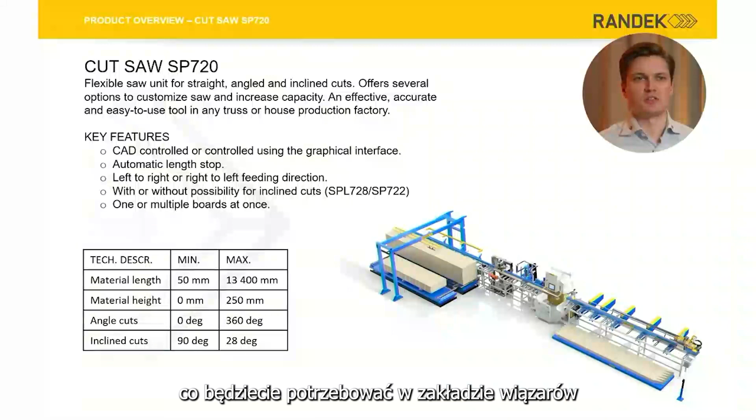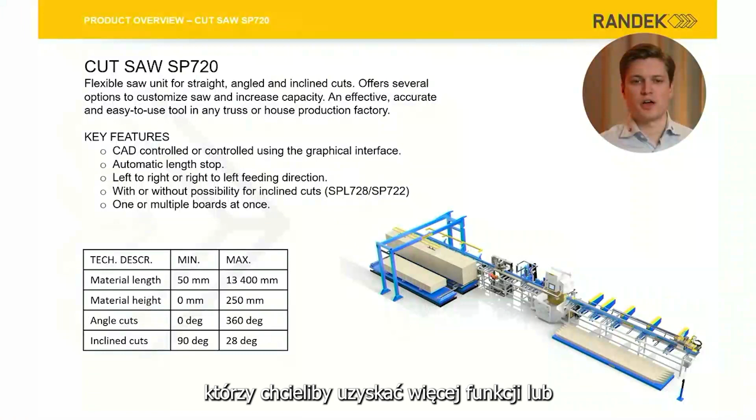As its base configuration, it does everything you will need in a truss factory or in a house factory for building walls and floors, gable ends, and so on, building elements. But we also offer a lot of options, add-ons and features to this concept to cater to customers that would like to add more function or put a specific task into this section of the factory.

So on the in-feed side, we have timber pickers. On the way into the saw unit, you have splicing presses, milling unit, drilling unit, label printers, and on the outfeed side, we offer different solutions for timber stackers as well.

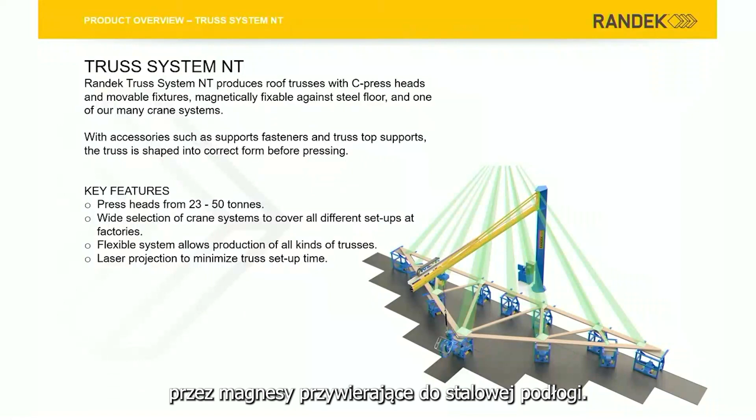For the truss system, we offer the NT press system. It's a very flexible system that basically can help produce any kind of truss design. We do this by movable fixtures that we can fix magnetically on a steel floor. On top of those, you add the pieces for the truss and the press plates, and you go around with a C-press, suspended in a crane system, and press each joint.

To further help and to minimize the setup time, you also have a laser projection system to help you. So to have the optimal press and crane system, we always take a look at the conditions in the existing factory. We take a look at the nail plates that you commonly use, and also the most commonly produced roof trusses as well. And this boils down to a crane system that you need.

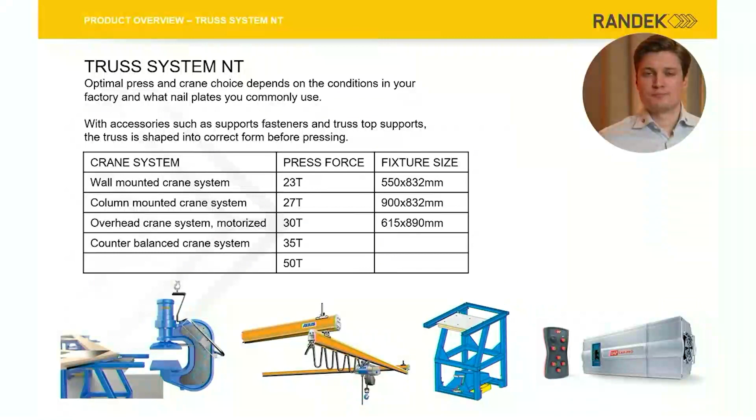We have various different ones, from wall-mounted, column-mounted, or overhead crane systems. In terms of C-press, it boils down to a specific press force from 23 tons to 50 tons. And for fixtures, it's a matter of how many and which size, which we, of course, help our customers with. As an option as well, as I mentioned, we also have laser projection systems where you can project the outlines of the truss and help you set up the system between different truss designs.

For wall panels, building elements, floor, ceilings, roofs, gable ends, we have our butterfly system, BS20 tables. It's also a very flexible system. It is a tool for producing a high-quality product in the end, very effectively, and it's a focus on getting equipment on site very fast as well for our customers doing the job.

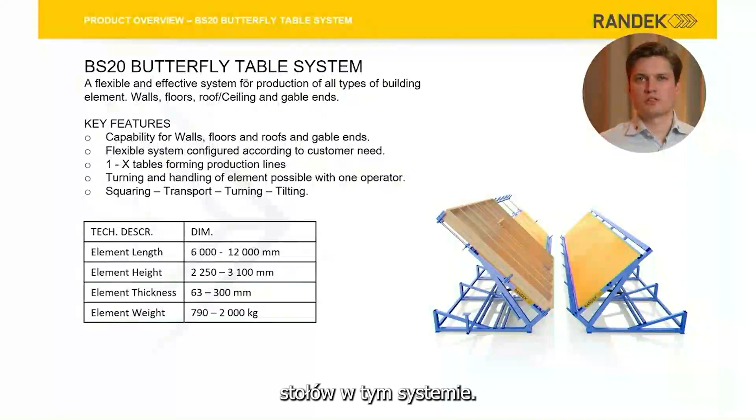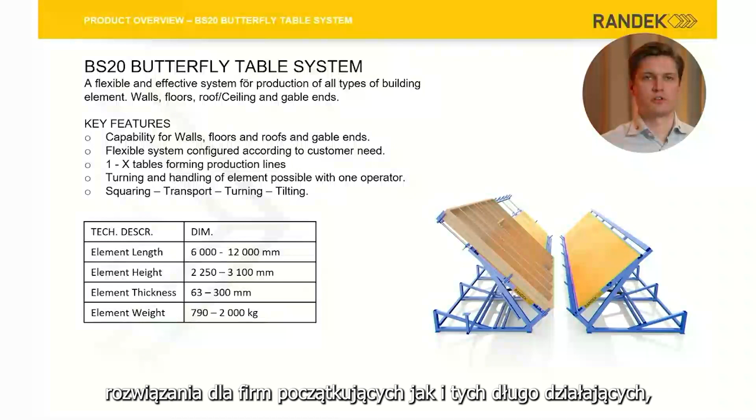We can do different configurations with each table in this product range, which makes it possible for us to have solutions for startup companies or even well-established companies producing a lot of product today, but looking for having more of a line concept or increase the efficiency in the factory. So within each table, you can have the base configuration of just an upriser and receiver, but you can also do configurations of bigger lines, how many tables you would like to have.

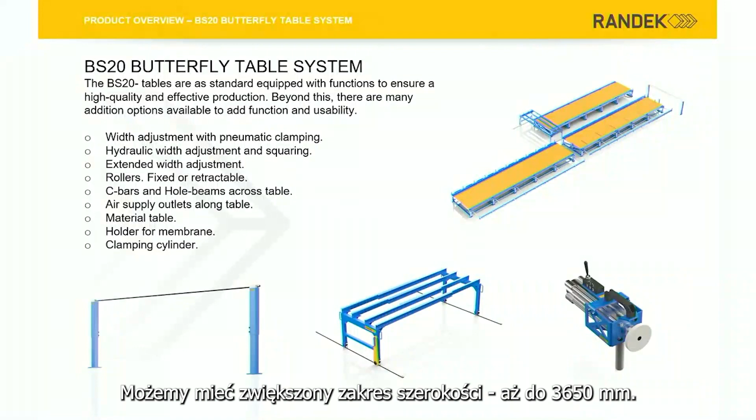And we do this by having different options for width adjustment. It can be manual or hydraulic or with pneumatic clamping. We can have extended width adjustment up to 3,650 millimeters. You can add rollers to the tables, either fixed or retractable, so it's folded down into the tables.

We can also add air supplies to make sure you can connect your tools, and on top of that, we can also provide our customers with options for material handling, such as material tables and holders for rolls for membranes and foil. We also have a clamping cylinder to make sure we can do angled elements within these tables.

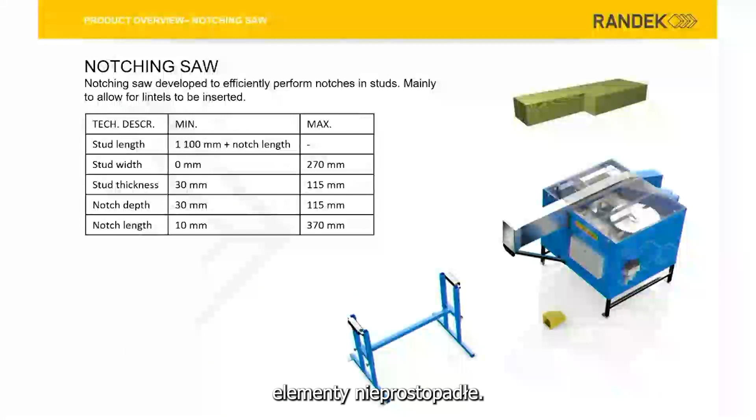For notches or cutouts in studs for wall elements to be able to make lintels, we have a specialized tool. This is possible with the SP720 as well, but if you want to do it as efficiently as possible, we have a specialized tool for this, the notching saw. It's a very easy to use tool, a very fast tool. It's a cycle time of about 5 seconds, and it's a small piece of equipment that you can move around in your factory, bring out when you need it, and so on.

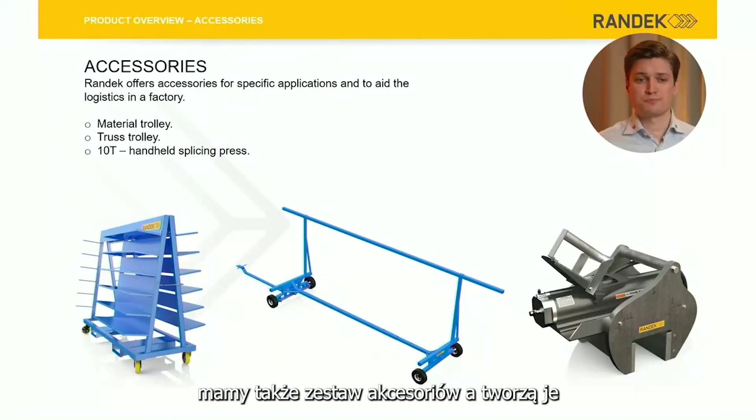So on top of all this, the product lines that we offer, we also have a set of accessories, and these are made up of products for logistics within the factory, but also specialized tasks in the factory, in the process of building all elements. So we have material trolleys, roof truss trolley, and also a handheld press for nail plates.

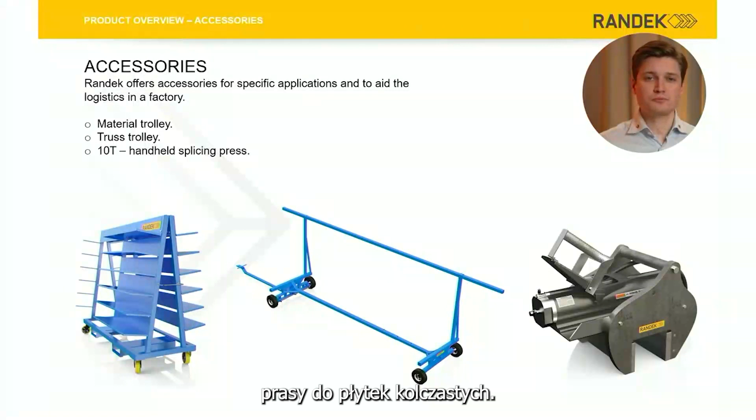So you can splice together pieces directly at the table. It's a handheld, air-driven piece of equipment, with hydraulics for the press unit, which makes it possible to press up to 10 tons.

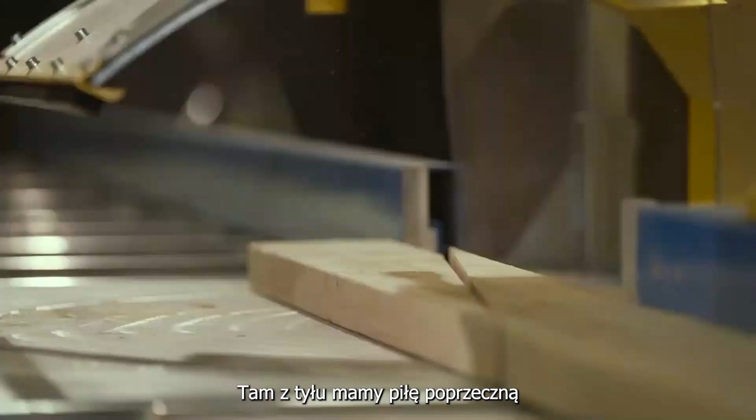So Martin, what machines are included in the House Factory Startup Concept? Yeah, we have different types of machines. In the far end, we got a cut saw. That's in the SPL 720 series. And behind me, we have the BS 20 tables in the BS system. Okay. And behind you here, we got the NT press system.

Okay. For roof trusses. And in the middle, we got the notching saw, for special cuts. Okay. So we're actually looking at this setup of machines, and it's an entire house factory in quite limited space. Yes. Well, it's really impressive, really impressive. So, Martin, when talking to customers about the startup concept, what are the general comments you get?

Yeah, it's a robust product and is cost effective. And the total cost of this is less money than the production of one house. Wow, so an entire house factory for less money than a single house costs? Yes. Wow, that's really impressive. I'm eager to start the demonstration, so where do we begin?

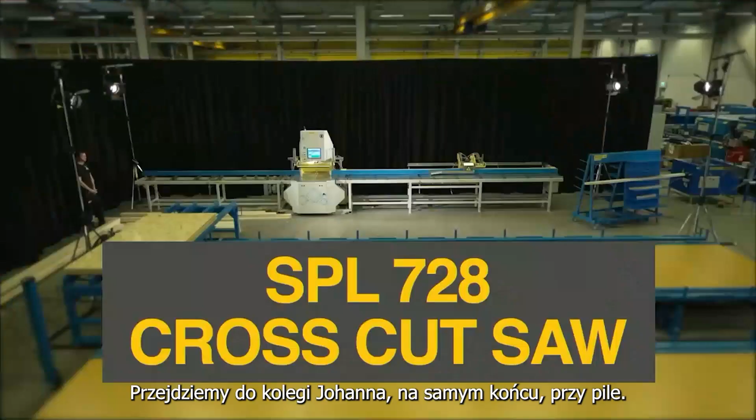Yeah, we'll go over to our colleague, Johan, in the far end at the cut saw. Okay, let's go. Shall we take this with us? Okay, let's do that. Okay, so here we have our service technician, Johan. Hello. Hello. He will help us to demonstrate the saw today.

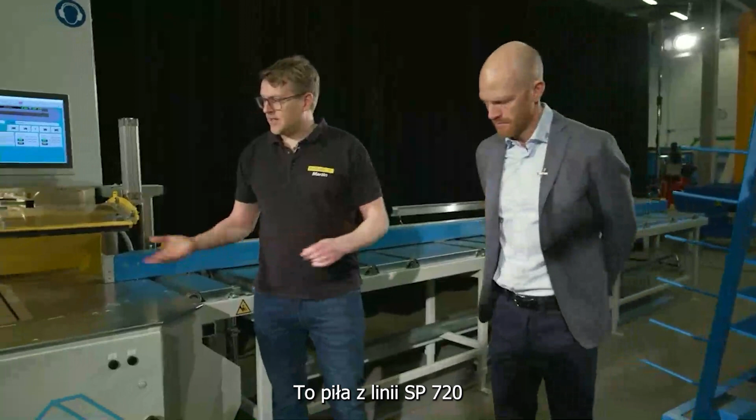But before we begin, Martin, here we have the SPL 728 crosscut saw. So can you tell us about the saw and what parts are included? Yeah, this one is a saw in the 720 series. Over here we have the infeed bench. Yes. We can load in your material. And here you have the sawing unit. This unit comes in two different types, 728 and 722. Okay. The difference is the blade can angle in the 728. Okay. So otherwise two different saw units.

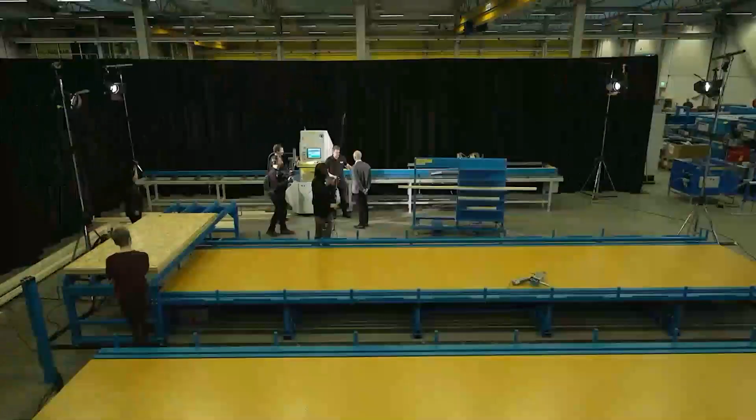Yeah. Okay. And behind me we have the outfeed bench with automatic length holder. Okay. So this is, I guess, kind of like a standard saw. In what ways can the saw be customized? You can change the length of the infeed bench to different lengths depending on incoming material. You can also change the outfeed bench with the same length dimensions. Okay.

And does it come with like a milling unit and splicing press? Yeah, you can add a splicing press, a milling unit, and a drilling unit. Okay, sounds like a very versatile and flexible saw. Yeah, it's very flexible. But if you want to increase the capacity, do you need to buy one more saw, or can you upgrade? Yeah, you can add an infeed picker, so you can pick up material from the material pile, so you don't have to lift it up by yourself. And also you can place a stacker in the far end here, so you can pick out the material. Okay. Very interesting. Shall we begin the demonstration, Johan?

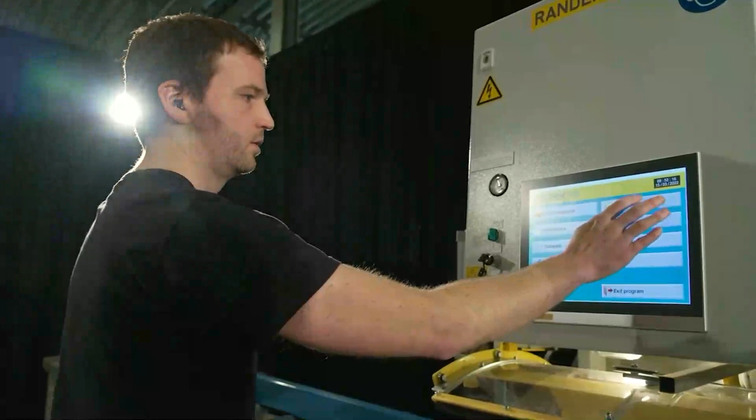Yes. So, first of all, we're going to cut a truss that I have already prepared. And I will say this is the way that most customers use the saw, running from a file. We can go from the main page, load from file. And here we have it prepared. These are all the pieces that we're going to need for this small truss. So we can press them and we can see how they look. Okay.

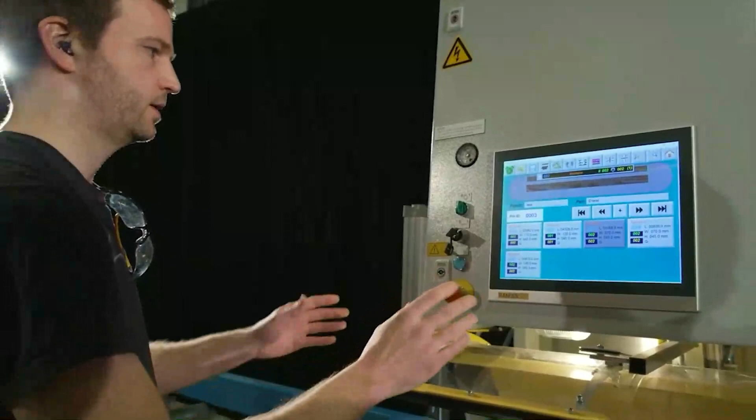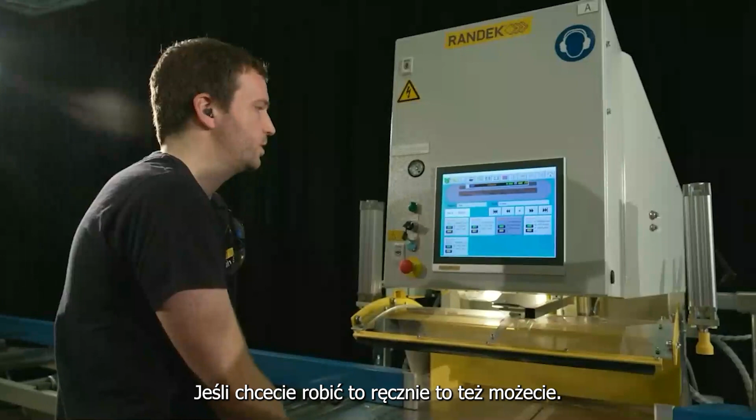The more angles you have and different lengths, the more benefit to do it from a file. It will save you time. Otherwise, you have to manually put in the degrees and the lengths on every piece. But here it's already prepared. But you have the possibility to do it manually as well. You can do it manually, just fill it in from a paper. Okay. You have that option too.

Martin, can you describe the process behind the file and the transfer from CAD software to the saw? Yeah, many of the roof truss producer softwares, where they draw the roof trusses, can send the data to the saw unit. They have a little converter file they have to add in the system. So then it's converted and goes directly to the saw system. Okay, so like an automatic process from the software, and then the saw will set up automatically according to the file. Yeah, and then the operator has to load the file here.

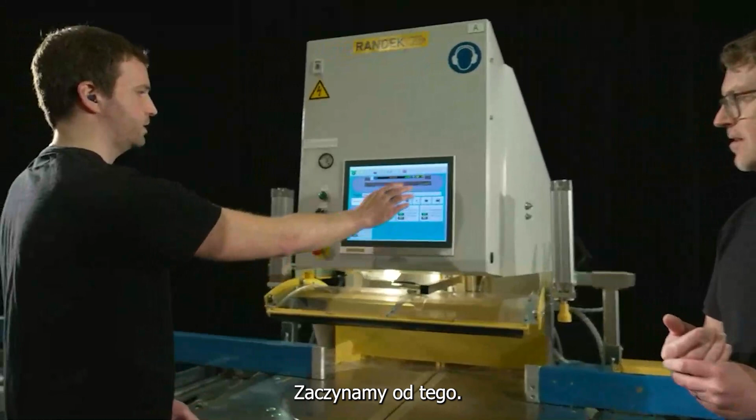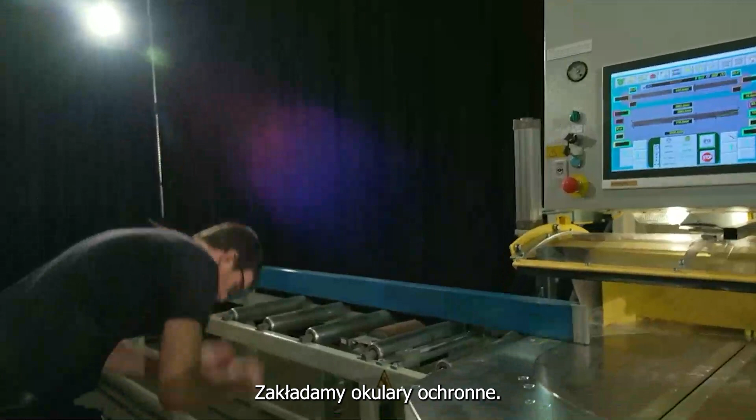All right, let's begin cutting. Yeah, let's make the first cut. So we start with this one. We press the blade. And, glasses on. Yeah. Safety glasses on. Safety first. We start the blade. So that was a clean cut. Yeah, a clean cut. You see that the bench is automatically changed. Yeah, I saw that.

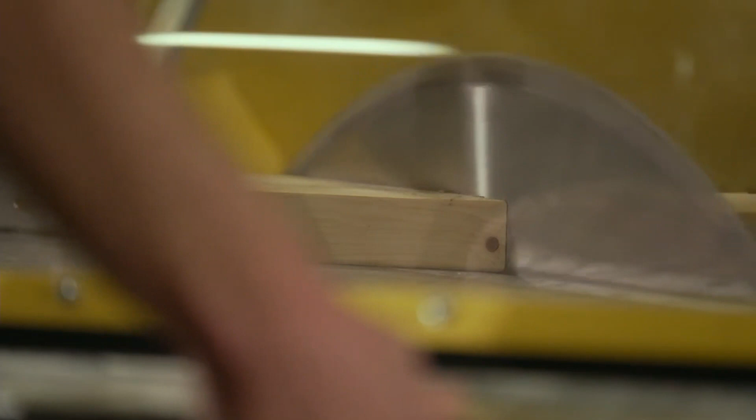Stop, get in position. You see here, press this surface. So we load the wood piece to the material wagon. So that was the first piece. Yeah, that was the first piece. Great. And of course, you do as many as you need, and then one more.

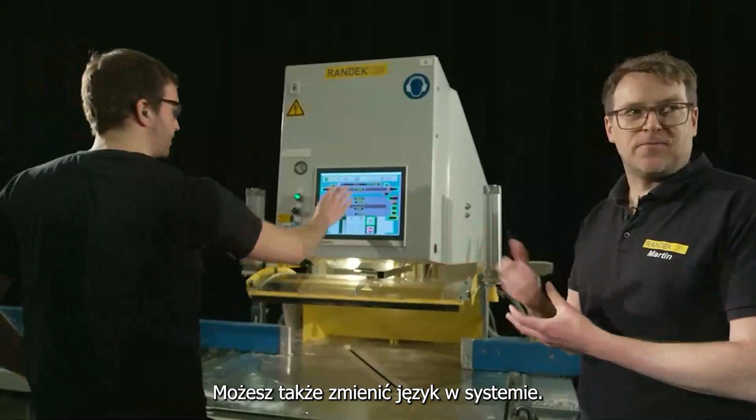And also, you can change the language of the system for different types of languages. It's not only Swedish. Now, it's an international saw, so we have it for the many markets. Impressive. Okay.

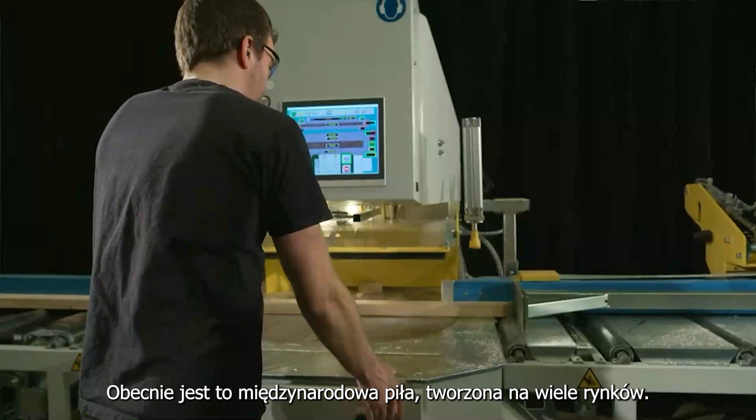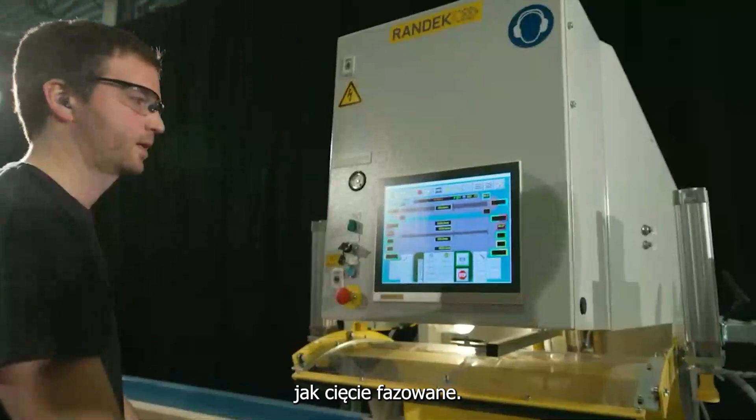So that was kind of the automatic way of using the saw when it sets up according to file. Yes. So we made 3 different pieces, and it's very easy to just. Can you demonstrate how the saw operates if you do it in a manual mode as well? Yes. Maybe we can do the most complex, like a hip end cut. Yeah. So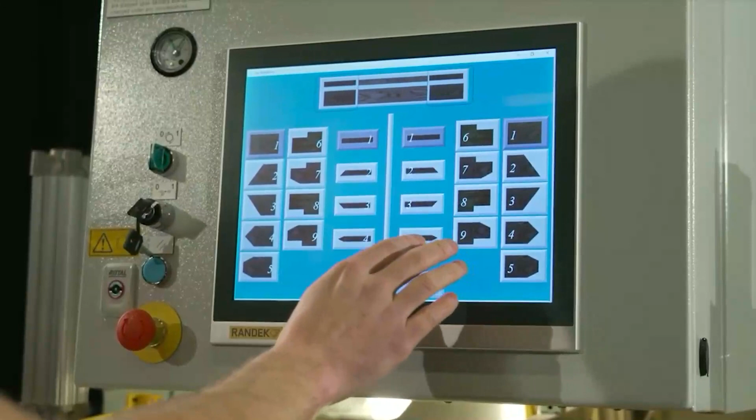If you want to do it manual, this is the main page. We go select cut type, and here we kind of design how we want it to look. So this is the timber from above, and this is from the side. If you want a tilted cut, so right now it's just a straight cut. Yes. If we want to do the hip end, as we call it, we want to have it tilted. So we're going to start with a straight cut and then do the so-called hip end.

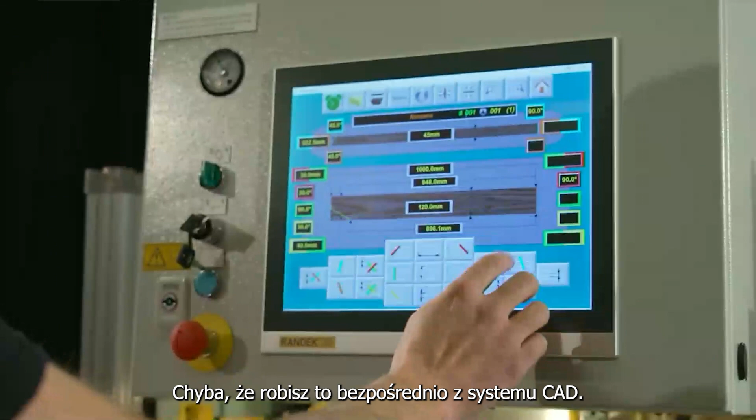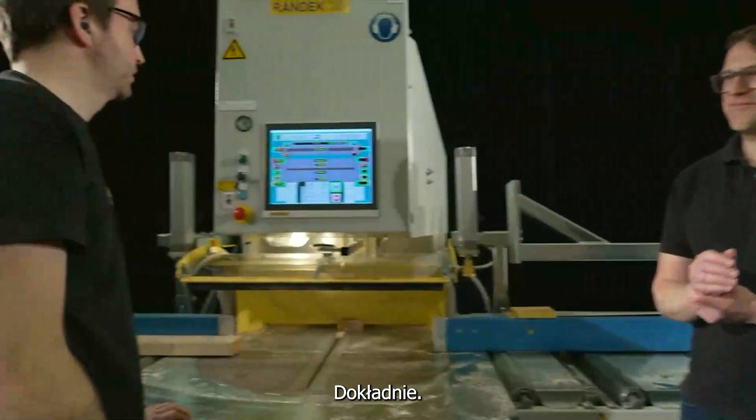As you see, if you do it manually, you have to press a little bit more. Yes. But otherwise, if you do it directly from the CAD system, the machine has prepared everything, so you don't have to press all the buttons. Correct. I understand. So let's try and make this cut. Yes.

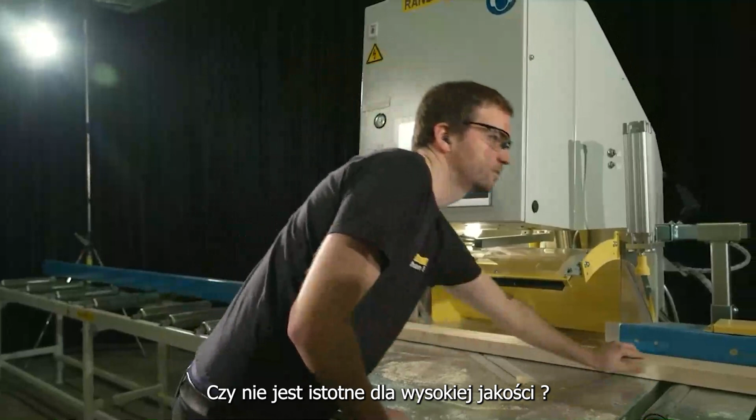And you also see that the material is fixed in the right position. Yeah. So we have draggers to drag it into the side. Is that crucial for a high quality? Yeah, sometimes the incoming material is a little bit bent. And then you get the help from this shifting tool.

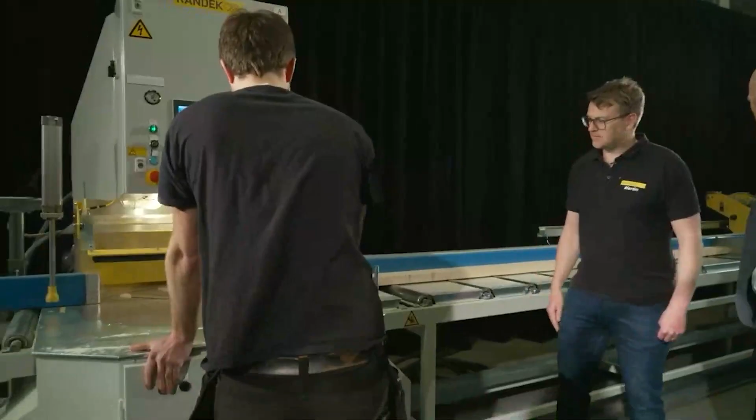So normally, I guess you connect this saw to some dust extraction system. Yeah, we don't have a dust extraction connected now. But otherwise it's in the end here. In the back. And you see the blade can be rotating around. Yes. So now it's blowing in that direction. Yes.

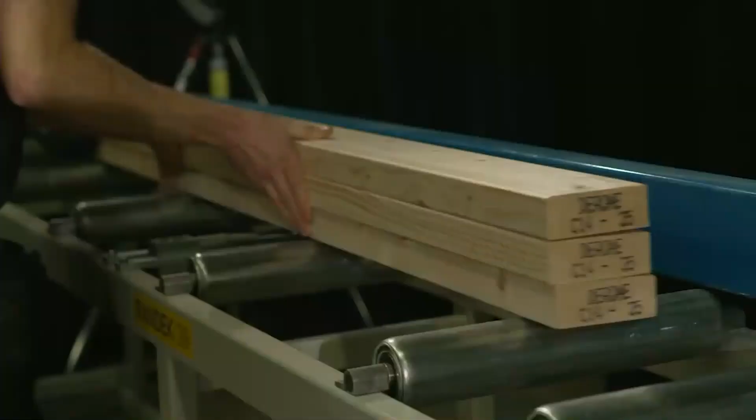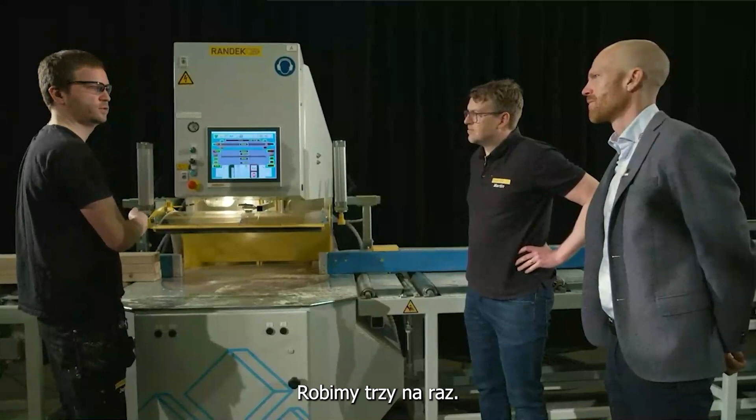So here you're actually cutting 3 wood pieces at one time. What's the purpose of doing that? To save time, be more effective. You can do it 3 at a time. As long as it's a straight cut or not too low angle, it's fine to do 3 at a time. Okay. Now it's going in. So that was kind of how you maximize the capacity with the saw.

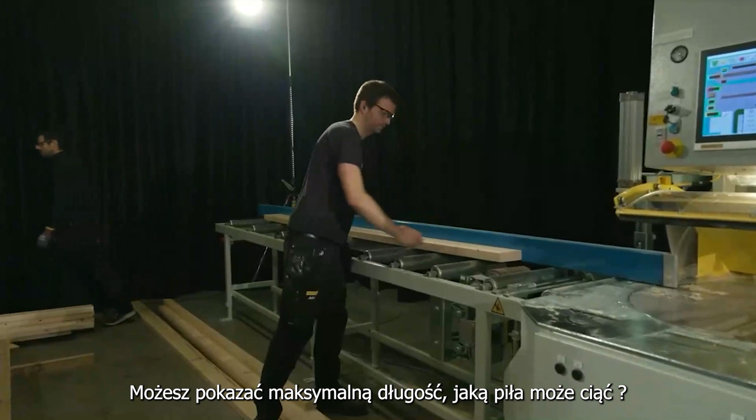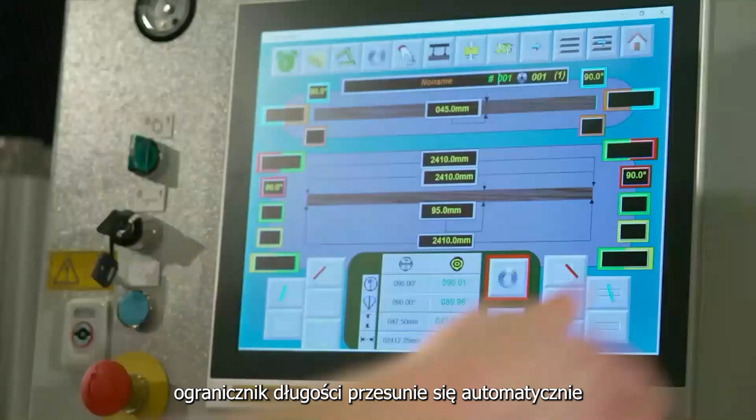Can you show us the maximum length of cut the saw can make? So if we have a really low angle that the blade can't make it once, it has to come up twice or even 3 times. If you do it at the end of the timber, it will do it automatically. The length stop will move and then the blade comes up a second time. If we want to do it at the front, we need help to position the timber from the length stop. So let's try that.

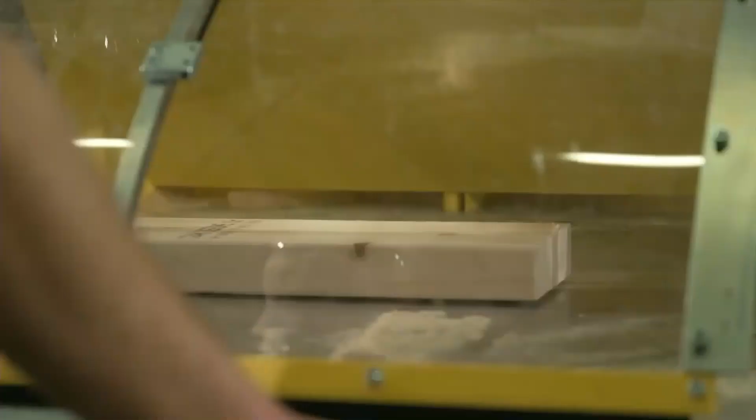We try the hard one. And the length stop is coming to help position the timber. That's an impressive cut you just made. Yeah. All right, but as you said, normally we have a dust extraction system connected to the saw. Yeah, we highly recommend that. Okay. All right, thank you for the demonstration.

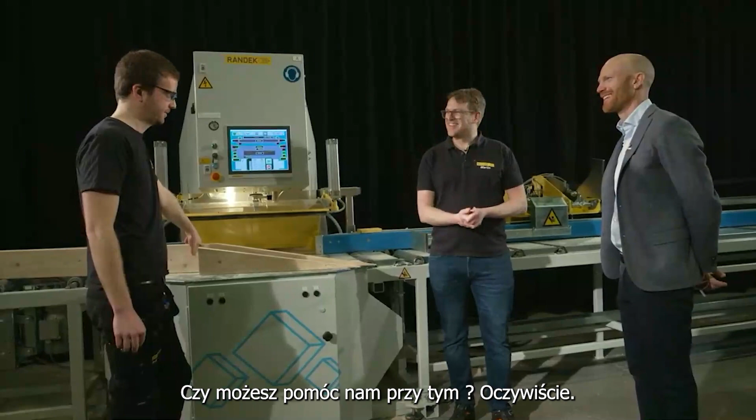Thank you. Anything else you would like to add here, Martin? No, I think you have shown us everything. Okay. So let's build a truss then. Can you help us with that as well? Sure. So we go over there. Let's go. Shall we bring something with us? Yeah, we can take the material back.

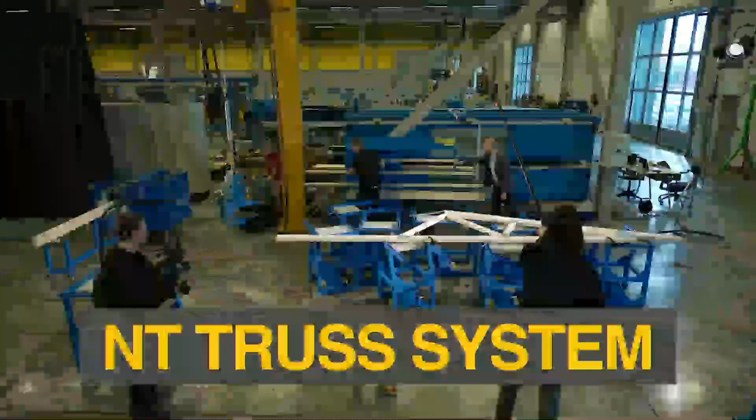Okay, Martin, so this is the NT truss system, production system for roof trusses. Can you tell us about the system? What do we have in front of us here? Yeah, the main heart is the C-press, as you see here. We use this one for pressing the plates. And this one we have in different sizes. The smallest one is from 23 tons up to 50 tons.

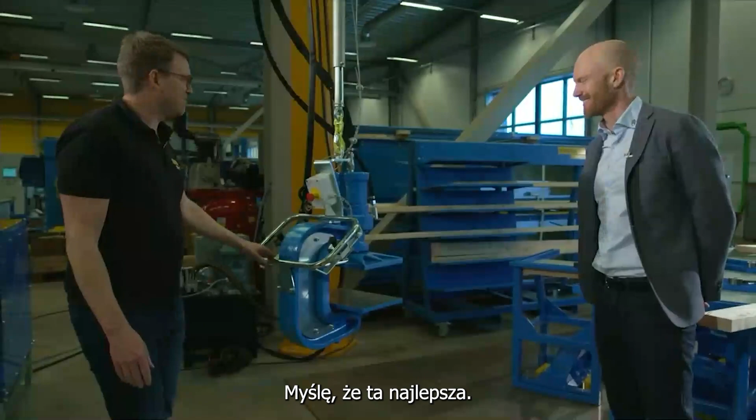And this is how many tons? This is 23. All right. And you have also 2 different types of function here, so you can press. You have pistol grip or this with a frame. Frame and pistol. What do you prefer? This one. I think this is the best one. And then we have some gantry system, I guess? Yeah. You can lift it up in different types of gantry system. So here you have pillar mounted, wall mounted, and you can have it railed in.

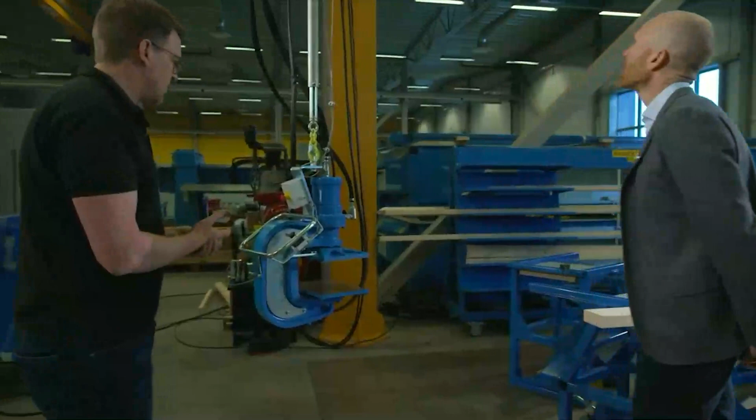Like a conveyor system? Yeah, conveyor system. Okay. And you can combine this conveyor system in different types also. Okay, so different types there. It's like 5 gantry systems? Yeah, 5 different systems. Sounds flexible and versatile. All right, C-press and gantry, and then what else?

And then over us here we have a laser system. So we have laser projection, they project the trusses. The same file that we saw before in the cutting, the same file they can use here. So if they have sent the data to the saw, they can also send the same data to this laser projection system. Ah, okay. So you know where to position these fixtures.

So you just move them? Is it easy to move this? Yeah, there's fixtures, you have different types. And they are fixed with magnets in this floor. So you have to unleash it first. Unleash the magnet. Yeah, unleash the magnet.

Okay, so now it's very easy to move around. Then you just want to fasten it. Yeah, and then it's difficult to move. Okay, I understand the function. All right.

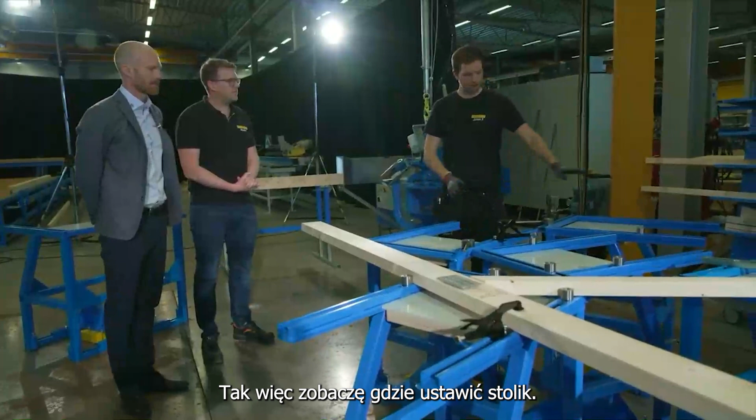Okay, so shall we produce a truss? Where do we have Johan? Johan, can you help us? I can help you. Hello again, Johan. Can you please help us to produce a roof truss? Yes. So we have prepared a little bit, but first of all, I'm gonna light the laser up so I can see where to place this fixture on the table. So I'm just gonna start up the laser.

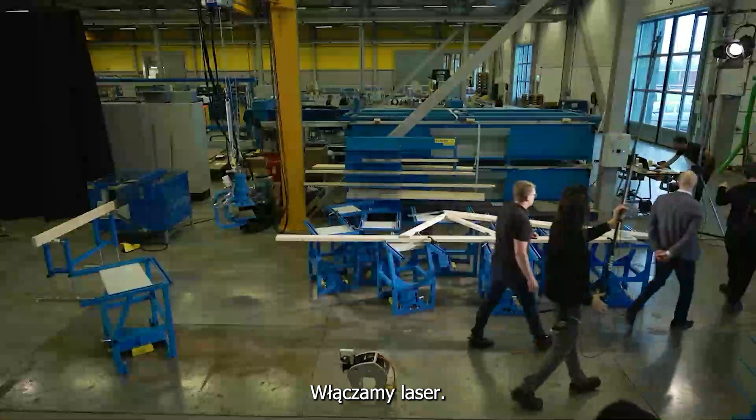Okay, so we switch on the laser. Laser is running. And over here we have this controlling box for the laser. All the lasers are connected to this one. Okay. So now we have the laser system activated. Yes. So now Johan has to prepare. We have prepared a little bit of the jigs here.

So now we take this fixture and place it in the right position. And you see here on the floor some marks, the laser projection. So Johan will move that in. So this is the way to use the laser, to place the fixtures in the right position. So you have an easy first step. Okay. So this indicates where the nail plate shall be placed.

But often they don't have a truss in it, just in this case now. So now it's prepared. Johan placed this one in a mid position, so it's easy to go in with a press later on. Johan, you cut up some wood before? Yeah, it's prepared. Some of it is already in place, but the timber is pre-cut, so we have it ready. So see if we can get it in place.

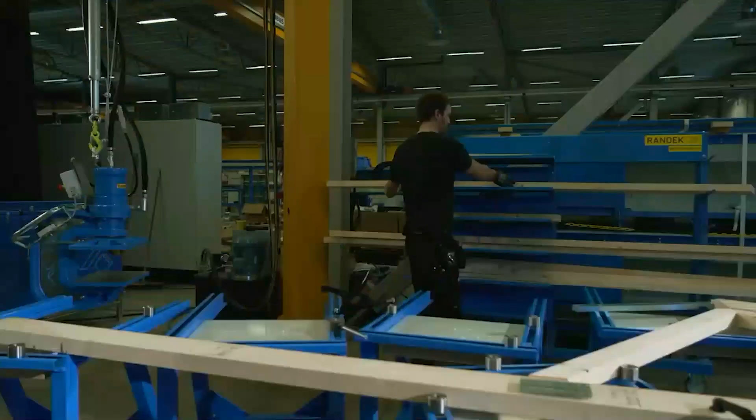So you see here the material wagon is nice to have. Very convenient. So if you make many of the same trusses, then you have prepared all the fixtures in the right position, and you just pick the material and place it in. Like a template. Yeah, and Johan can also switch layers. So now we see where you should place the plates. But later on, he can show you where the lines for the web and the joists are.

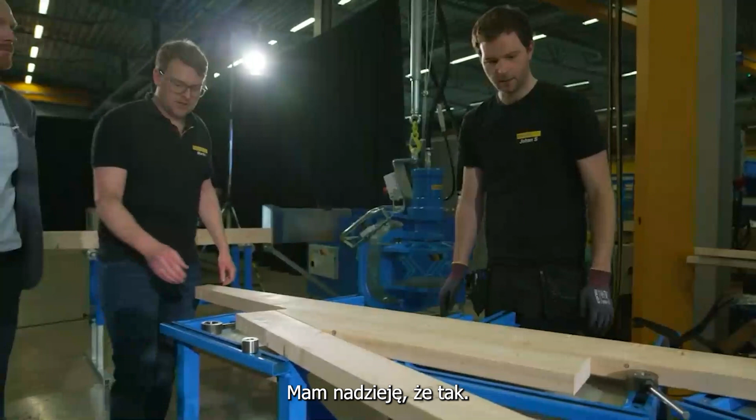Small web member. Looks like you did a good job with the cutting, Johan. Yeah, hopefully. Also, Johan has some fixture pucks ready, and he can use this one to press it in. So now most of it was prepared, so now it's like laying a puzzle. The first time you set it up might take a little while, but then it should be easy to just place it.

And we have this equipment, those round supports, and this eccentric, if we need to force the timber, if it's bent or something. And we also have the quick grips to hold it down, just to keep it in place, or if we need to force it down. Okay. But can you also show us how to change the layers in the laser? I will get the remote.

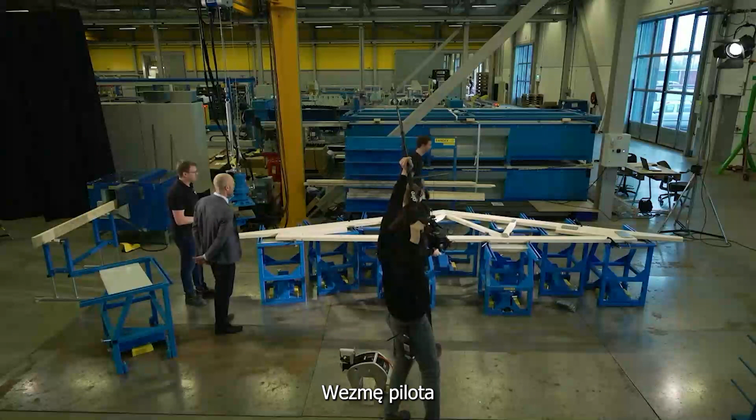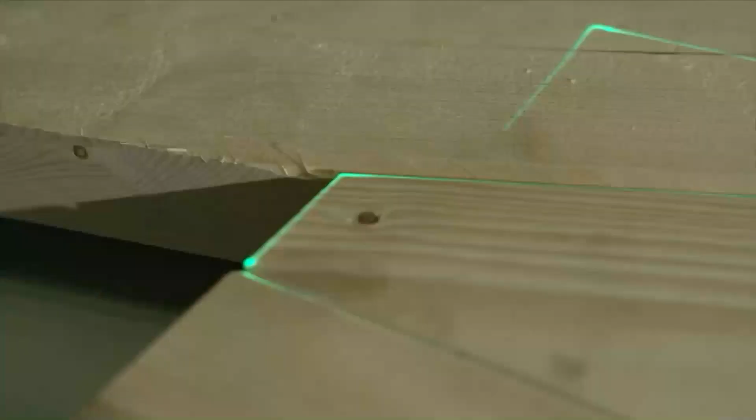So. All right. Yes, and the plates. You have truss plates here. So then you can use the laser to place the plates. Yeah, I mean the bottom plate you are putting in place before you put the timber on. Yes. But that's already prepared. So based on the laser as well. Based on the laser, so you see the lines that the laser projects on this plate here. Yes. And then you know where to place it.

Yeah. Then you put the timber on, as we have done, and now we're ready to place the upper plate. Yeah. Okay. And now you have also activated the lines for the placement of the wood. Yes. You can see here. So now we are projecting everything, both the timber and the plates. We can choose to project the plates or the timber or both. Okay. Yes.

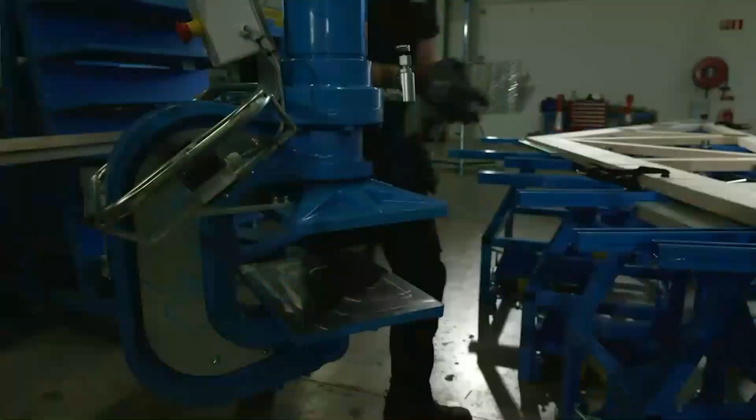So it's really good to have these lines if you have a really complex truss. Then you can use this to see where you should put all those small parts. Yeah, I understand. Okay. The laser makes the setup time much shorter, as I understand. That's the main purpose. All right, let's start pressing. All right.

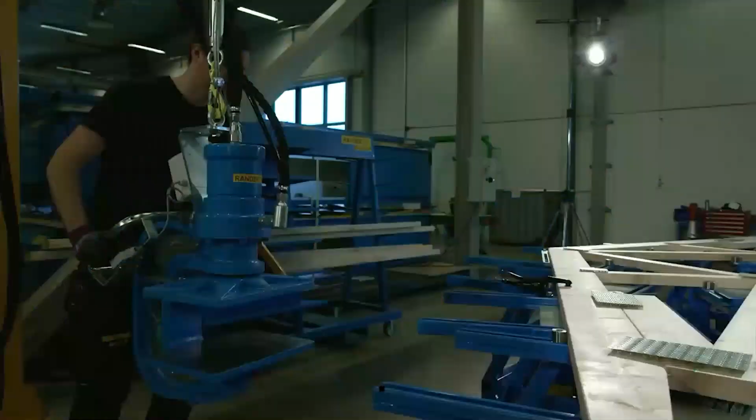So if you didn't have the laser, you need to measure where to position the nail plates, I guess. Yes. And as you see now, first he used the laser to place the plate underneath, and then he used the laser to place it on the top. Yes. Now he takes the press. And he's going into the fixture, and the top side is moving down, and the bottom side is pressing up the bottom plate there. Okay, let's go.

So now it's finished. So we have now a 23-ton press. Why would you need a bigger pressing force than 23-ton? Sometimes they have bigger plates, really large ones. Yes. And they have another type of wood. Okay. So then you can need that press. And different markets also require different press forces. Okay.

As you see here, this was moved a little bit, but because of the laser, you can still see that this was in the same place anyway. Otherwise, if you didn't have the laser, you have to measure everything up again. Yeah, yeah.

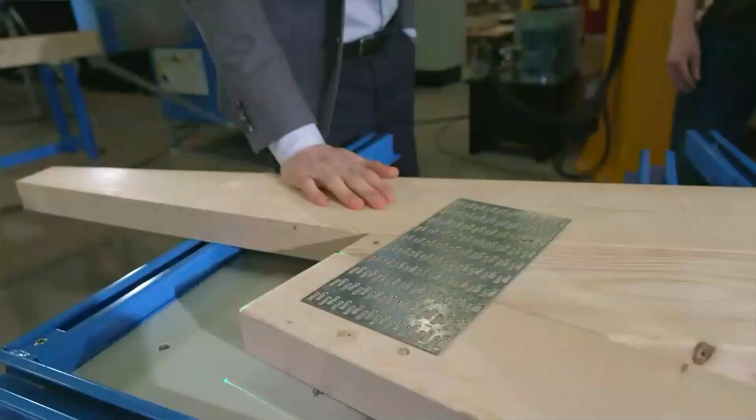Okay, thank you for the demonstration. Very impressive system. Is there anything you would like to highlight with the system before we continue? Yeah, this system here, you can add as many fixtures as you like, so you can expand. So for more complex trusses, you can place more fixtures. Okay, so you simply add more fixtures to build the system.

And the same if you have larger roof trusses. You can, if you have the conveyor version. Yes. Then you can also build longer trusses, and the laser system is expandable. Okay. So there you have some features. Okay.

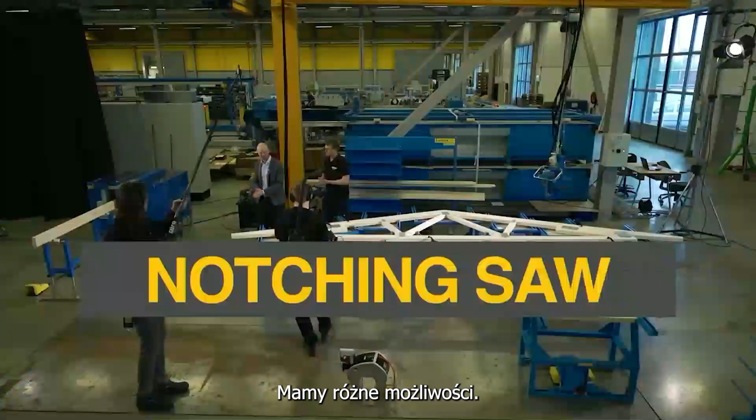Yeah. Well, Johan. Where is Johan? I'm here. Hello, Johan. Can you once again help us? Yeah.

As you see, it's quite dangerous, so you have to have the lid on. Okay. But we actually have one more saw in the startup house factory system. Is it needed to have two saws in one house factory? Yeah, this one is for special cuts they do on some markets. All right. So then it speeds up the production. So it's quite good to have it. Okay. So to make like a special cut. Yes. Okay. What are we looking at here?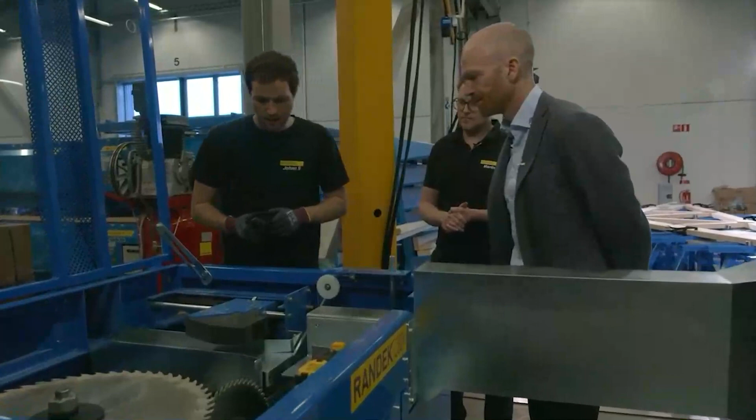Yeah, well, other than greasing it, you don't really need cleaning it. You have it closed, so you can adjust everything without opening it. Okay. So timber comes in here, and we have one blade cutting this direction, the other one that direction at the same time. Okay. To make like a notch in the stud. All right.

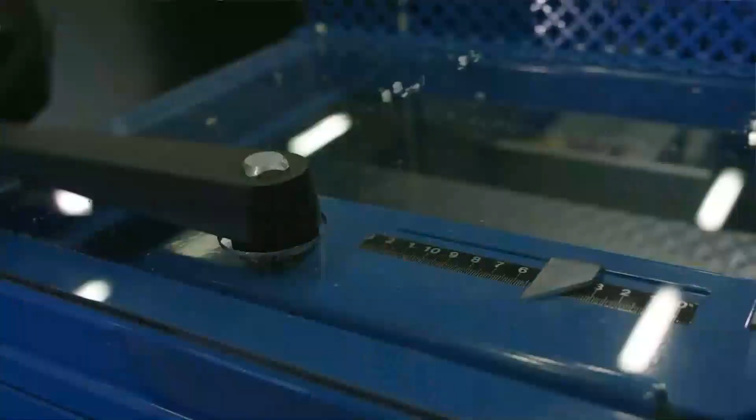And to adjust the measure, it's manual. So you just... Okay. Now you're setting it up for different dimensions. Yeah. So now we will make the parts for the wall. Okay. That we will do later on. All right. Isn't it, Johan? Yes. So then he just moves it into the right position.

There we go. And now you can see that it's really fast to do this cutting here. This is a special cut. Yeah. Okay. We just start the blades.

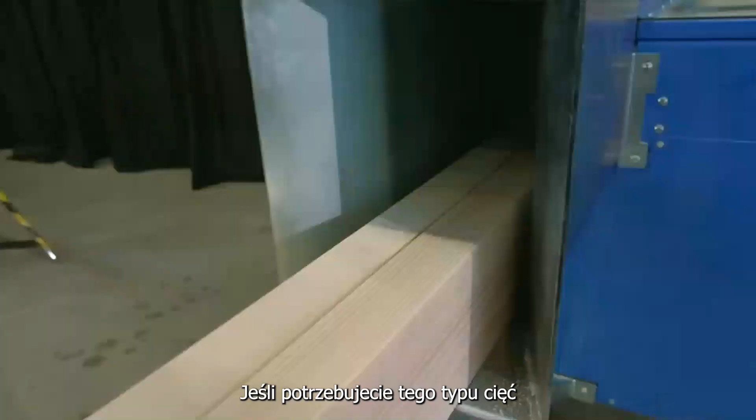Yeah, and also this one you need to connect to a dust extraction system. Yes. Okay. But now I fully understand why it's needed to have two saws in the startup factory, if you need to have this type of cuts, and it's an extremely short cycle time. Yes, Johan. Thank you.

Okay. Where do we go next? Now we're going over to the BS system, the butterfly system. There are turning tables for making wall elements and gable ends. And Johan and his colleague will help us to make a small wall. Okay. Let's go.

Okay, so this is the BS20 butterfly table system. Yes, it is. So we're standing in front of an upriser table and we have a receiver table over there. Can you give us a walkthrough about the functions and possibilities of the different tables? So this one here is an upriser table. And we also have squaring, so you can square the element.

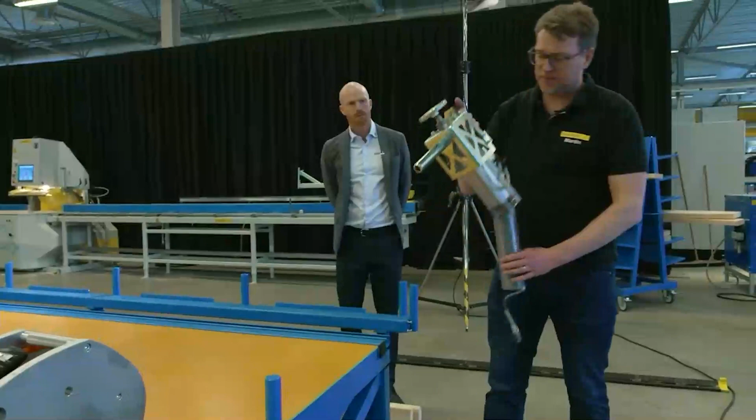So if you see this one here, you have a beam on this side. And this is a tool that you can use for clamping. We don't have any clamping hole on this table, otherwise we have a hole beam placed over here, and we'll place this one in the hole beam. You can use that to do gable ends and other non-rectangular forms. So the hole beams are like an option for the tables? Yes.

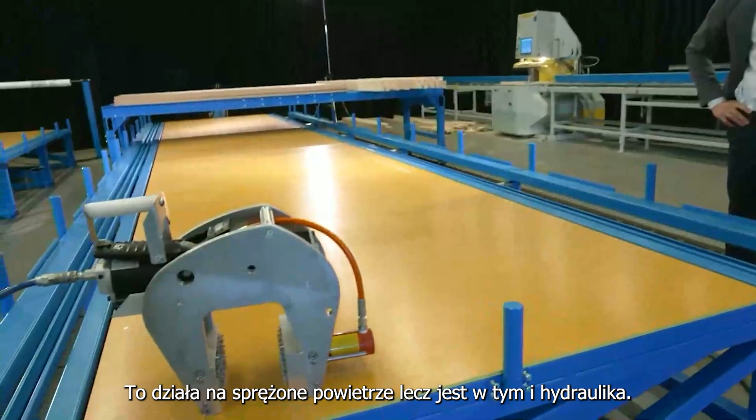And also we have this tool here, this is an NT10. This is a press that you can press plates with, similar to what we saw before. But this one is more manually moved, so you can press plates on the bottom plate or top plate. And it runs on pneumatics, as I understand. Yeah, it's pneumatic powered, but there are hydraulics also involved.

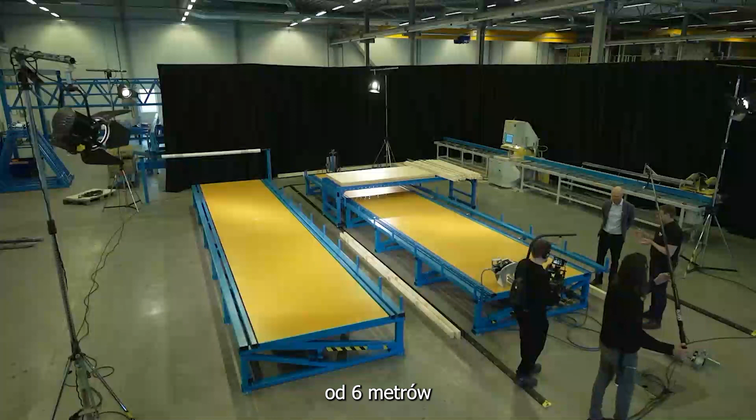Does the table come in different lengths, or do you have a standard? Different lengths, from 6 meters and up in steps to 12 meters. And as you see at the top here, we have a material table that we can drag. Shall I try it? Yeah, try it. Quite easy to move. So you can place the material on this in the far end or in that end, and drag it with you when you're building the element.

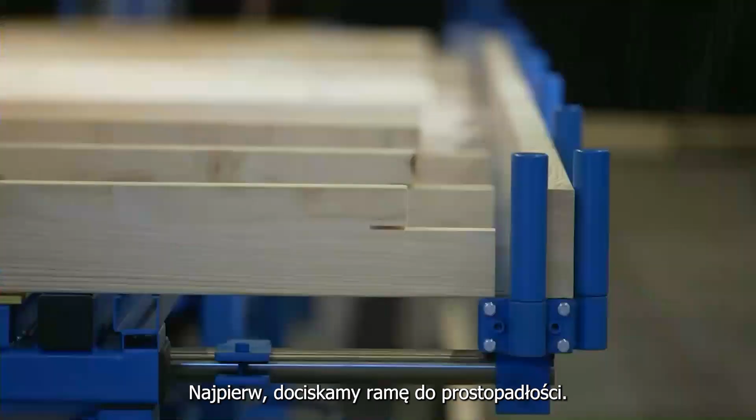And also, I forgot to mention, when you turn the element, you have pneumatic cylinders here. First, when you square it up, you clamp it in with pneumatic cylinders. When you turn it over, you release them, and the element can fall over to the opposite side. Do you have other systems for clamping? You can also have it in hydraulics, depending on how we want to do it.

And you have 2 tables. Can you only buy 1 table, for example? So this is a pair, we call it BS20. But if you want to place a table before that without an uprising function, you can place it here and do the same thing, but not the uprising. Then you also have pop-up rollers placed here and on that side, so you can lift it up and move the element station to station.

So you basically divide the working process from 1 table onto 2 to increase the capacity. Yeah, so it's easier to get the material around. So maybe in the first step you make the framing and sheets on this station, etc. Interesting. Looks like a good starting system. Shall we go over to the end here? Yes.

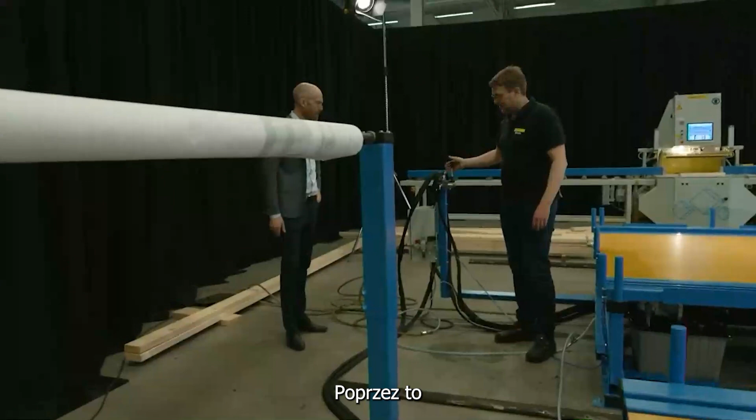Okay, and what do we have here? This is the hydraulic turning system. Over here we control the turning process with this. This can be placed on this side or the other side, or separately placed, but this is the standardized version standing here. Good visible overview of the tables here. Yeah, it's really good to see the turning process, so that's why we place it in this position.

All right. And also, sometimes they use Tyvek in the process. So we have this first step in a holder for plastic rolls or Tyvek or different types of membranes. Okay. And also you have like a cradle. It's another function that you lay the roll in. Ah, okay, so like the more advanced version. Okay. But this is good for startup.

Yeah. Okay, shall we start the production? Yeah, I think so. Okay, guys, you can start the production.

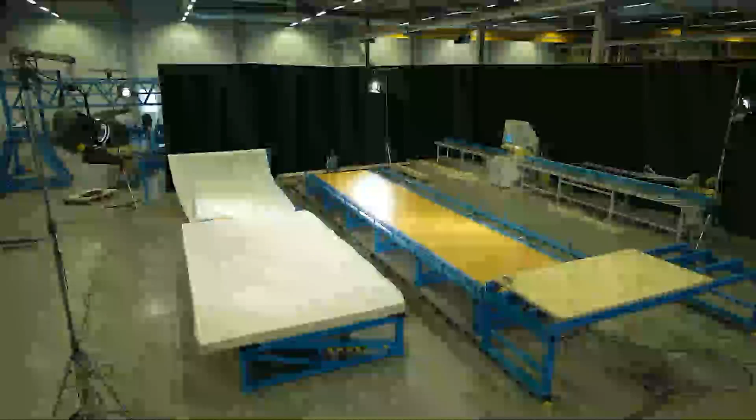Many thanks for the demonstration. I do think that our audience now fully understands what the House Factory startup concept is about. Before we end this demonstration, is there anything special you would like to highlight for our viewers? Yeah, as I said before, the cost of this line, this concept, is lower than the production of one house. Yeah.